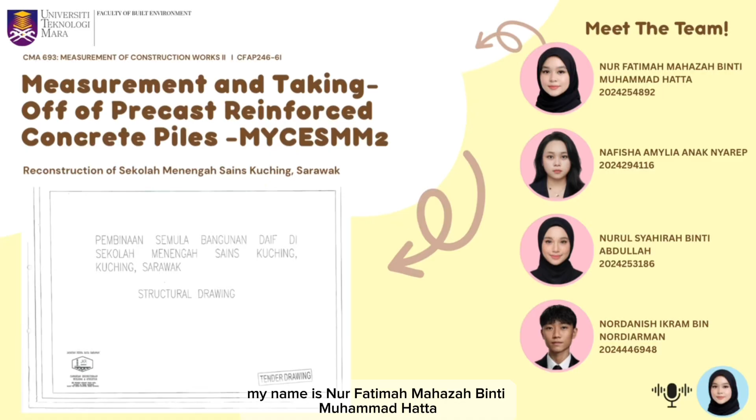My group members and I carried out a measurement and taking off exercise for precast reinforced concrete spun piles. This assignment is based on the reconstruction project of Sekolah Menengah Sains Kuching Sarawak. The objective of this study is to demonstrate the systematic taking off process and the preparation of quantity calculations and bill of quantities in accordance with the MyCESMM2 method of measurement.

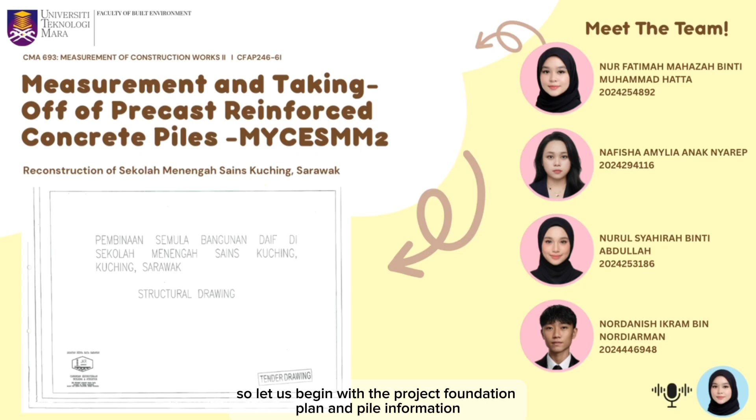So, let us begin with the project foundation plan and pile information. Next, before carrying out measurement, it is important to understand the purpose of piling work. They provide structural stability and are commonly used when the surface soil is unable to safely support the building load. For this project, the pile type used is a precast reinforced concrete spun pile with a diameter of 300 mm.

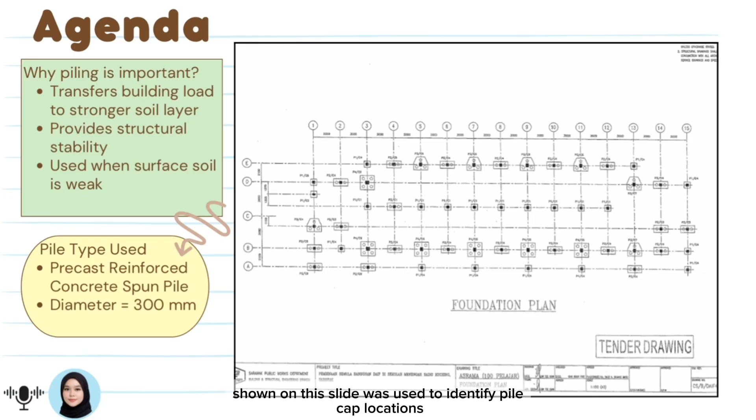The foundation plan shown on this slide was used to identify pile cap locations, pile arrangement, and pile types. These drawings serve as the main source for all quantity calculations carried out in this assignment. Moving on to the next slide. This slide presents the taking off list and query list used during measurement. The taking off list contains all piling work items measured in this project, which also include piling equipment, supply of extension piles, depth driven for initial and extension piles, pile head preparation, and pile testing.

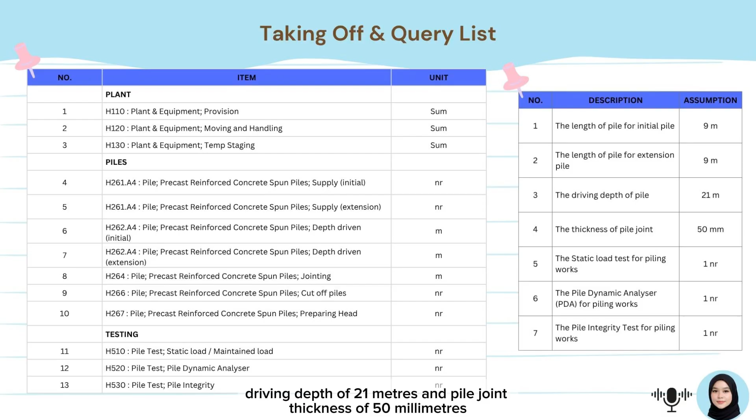So, several assumptions were also established through the query list to standardize the calculation, such as pile length of 9 meters, driving depth of 21 meters, and pile joint thickness of 50 millimeters. These assumptions ensure consistency and accuracy throughout the measurement process.

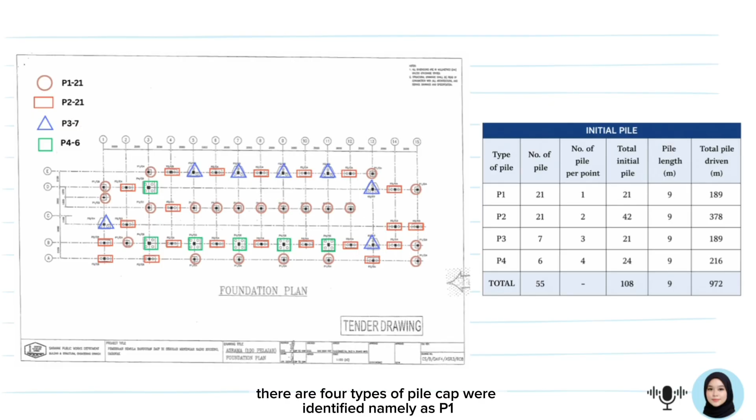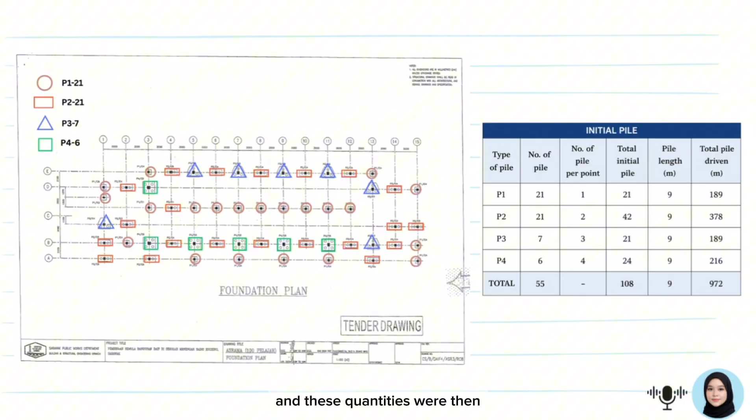Next, this slide shows the calculation of initial piles based on the foundation plan. Four types of pile cap were identified, namely P1, P2, P3, and P4. The number of pile caps for each type was counted directly from the drawing. These quantities were then transferred into the measurement sheets later used in the preparation of the bill of quantities.

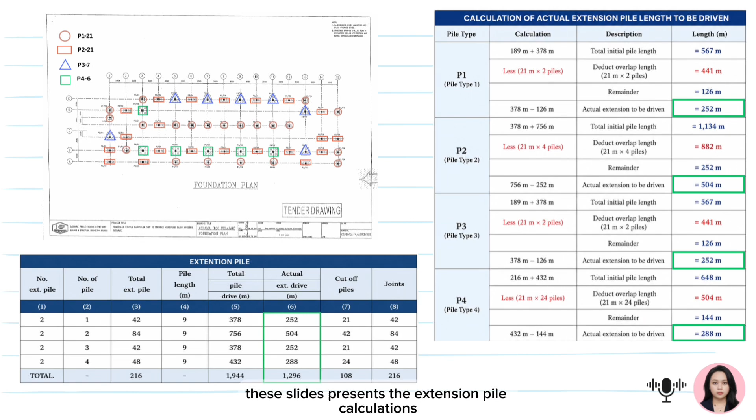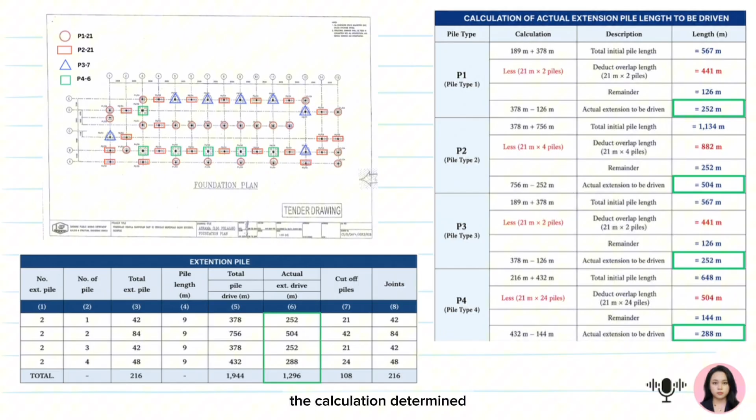This slide presents the extension pile calculations and the actual extension pile length to be driven. Based on the assumed driving depth of 21 meters, additional extension piles were required beyond the initial pile lengths. The calculation determined that a total of 216 extension piles were needed. The actual extension pile driven lengths were calculated separately for each pile type.

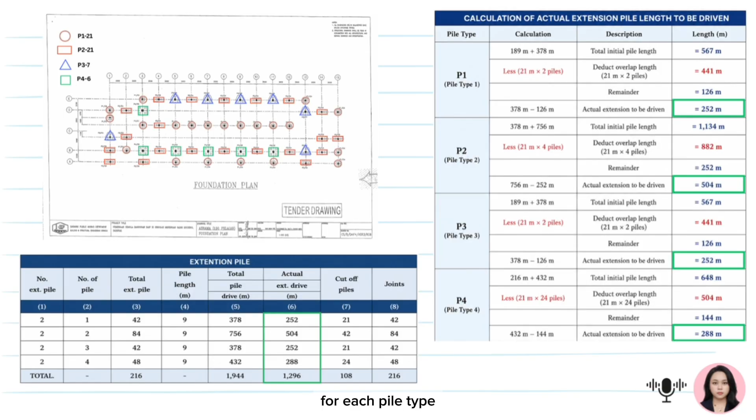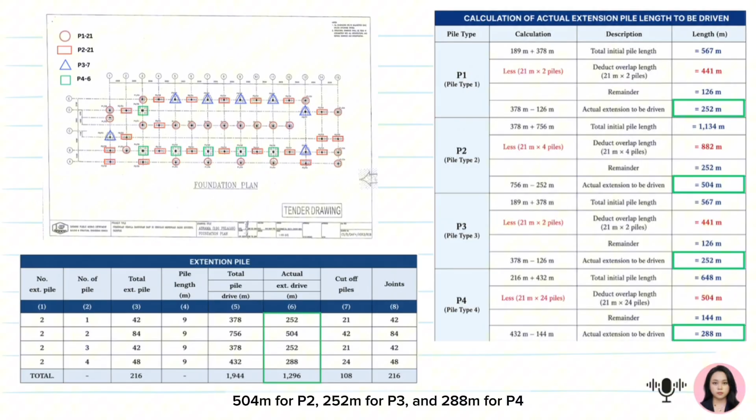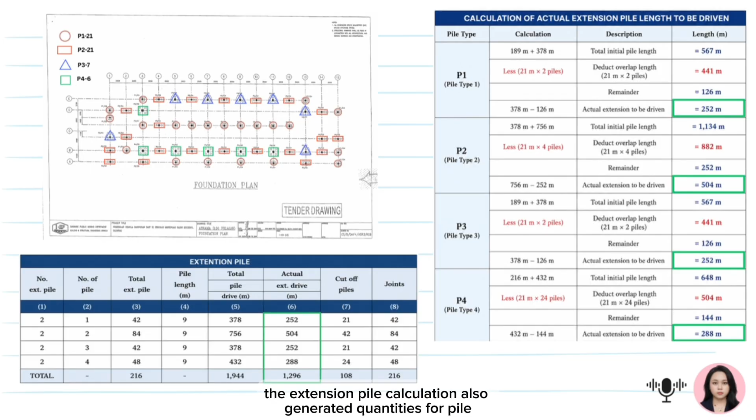The results show extension driving lengths of 252 meters for P1, 504 meters for P2, 252 meters for P3, and 288 meters for P4. Therefore, the total actual extension pile driving length is 1,296 meters. The extension pile calculation also generated quantities for pile jointing and cut-off works.

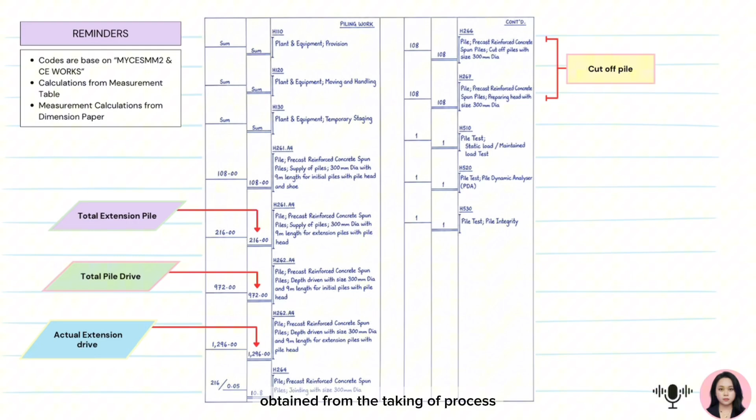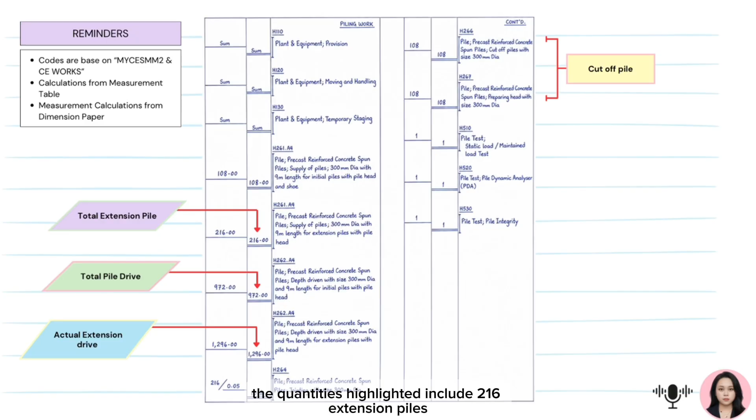Next, this slide shows the dimension paper prepared using the measured quantities obtained from the taking off process. The dimension paper records all measured quantities according to standard measurement practice. The quantities highlighted include 216 extension piles, 972 meters of initial pile driving, 1,296 meters of extension pile driving, and 108 cut-off piles.

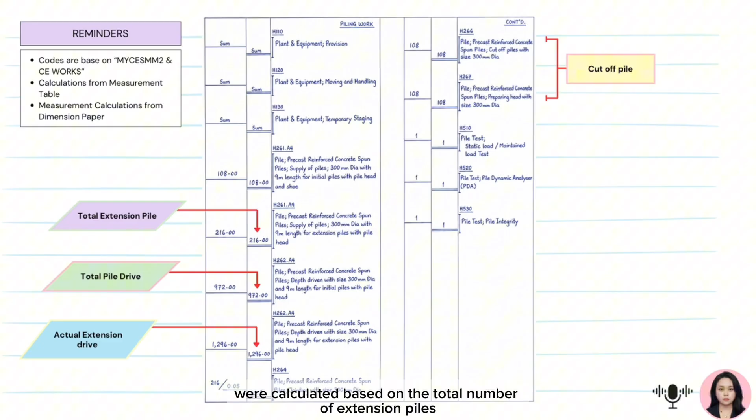Jointing works were calculated based on the total number of extension piles multiplied by the pile joint thickness of 50 millimeters, resulting in a quantity of 10.8 meters. The dimension paper serves as an important document because it links the measurement calculations to the final billing process.

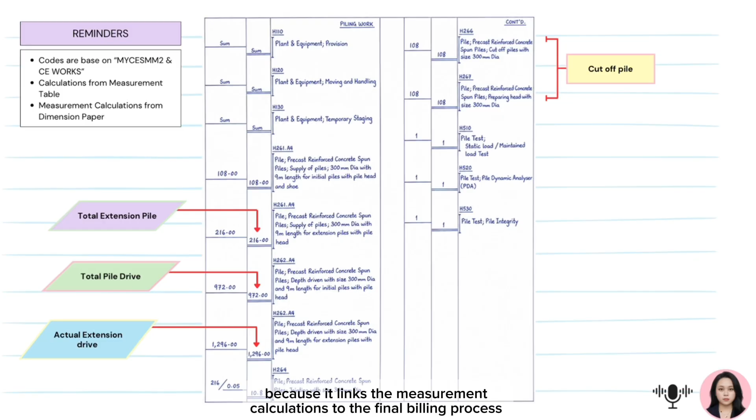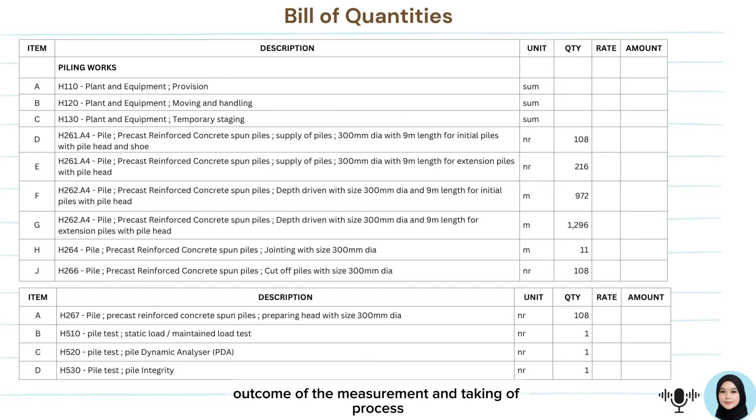We have come to the end, where this slide presents the final bill of quantities for the piling works. The measured quantities obtained from the taking off sheets and dimension paper were transferred into the bill of quantities using the appropriate MyCESMM2 descriptions and units. The preparation of the bill of quantities is the final outcome of the measurement and taking off process, providing a structured document for cost estimation, tender preparation, and project cost control.

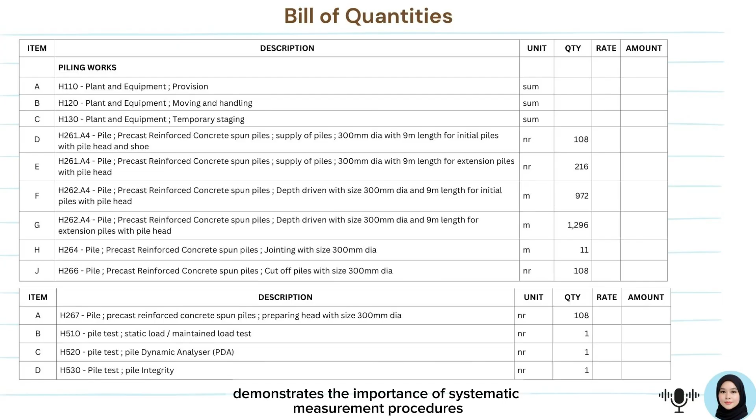In conclusion, this assignment demonstrates the importance of systematic measurement procedures in producing accurate quantities, minimizing errors, reducing material wastage, and supporting effective construction project management.